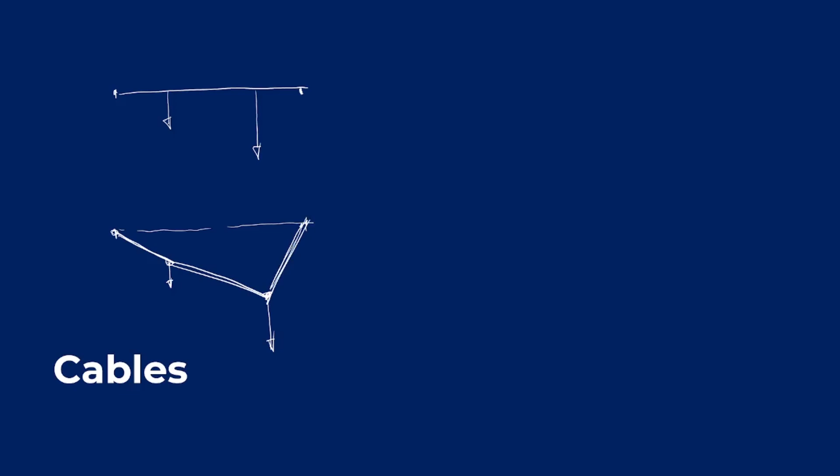So from this point going to here, we have a straight line. From here, going to here, we also have a straight line. And from here, going to here, we also have a straight line. Now, that is one of the cases.

The other case is when we have a cable subjected or loaded by its own weight. What happens, for example, is we have a cable initially like this one. And then, since the cable has its own weight, what will happen is that the cable will sag because of its weight.

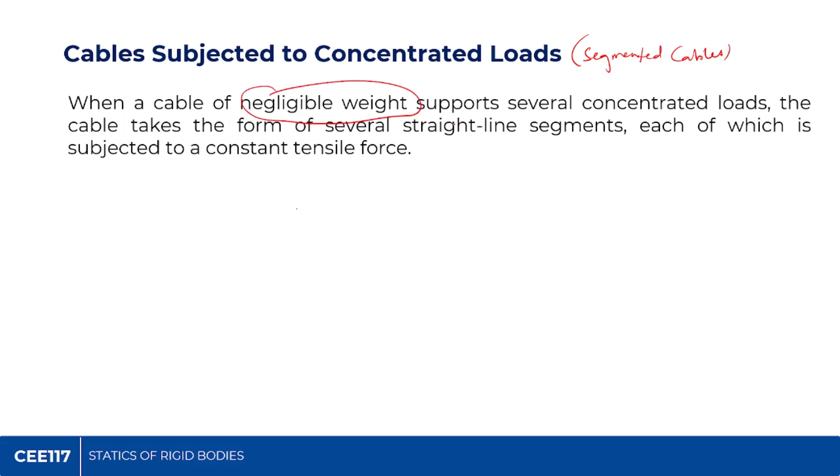When a cable of negligible weight, okay, we assume that the cable's weight is negligible, when that cable supports several concentrated loads, okay, the cable takes the form of several straight line segments. That's why it's called segmented cables.

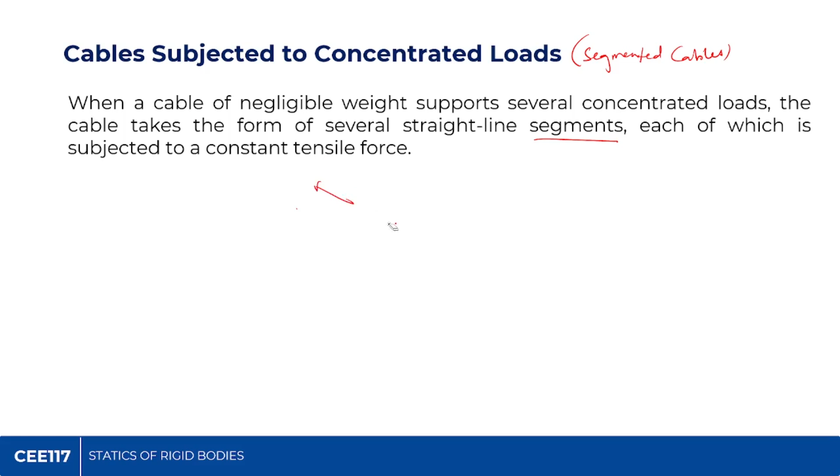Each segment is subjected to a constant tensile force. So unlike with plane trusses, where we assume that all members are in tension, and upon calculating, if negative, then our assumption was wrong for that member, so we can conclude that specific member is in compression. But for concentrated loads on cables, or segmented cables, our assumption is always tension, and the cable always experiences tension, not compression. There's no rope that can be compressed. So the rope or cable always experiences tension.

Okay, example, like this one. We have a cable or rope like this, and you'll notice it being subjected to a concentrated load P1 and another concentrated load P sub 2. So when we apply P1 and P2, what will happen?

Mag-sag yung cable natin. Nag-apply tayo ng P1 o load dito, concentrated load sa point C. Ito yung reference point natin. So galing sa reference line, papunta dito sa actual na nangyari, nagkaroon tayo ng sag at point C. Sa Bisaya, nilaylay ang atong cable, at that amount. If we also apply concentrated load at point D, it will also have a sag denoted by Y sub D.

So kung i-add natin lahat, yan yung tinatawag nating span. Sinasabi nating span, that is the distance from each supports, kung saan naka-tie up yung cable natin.

Basically, magkakaroon tayo dito ng parang joint method, o method of joint sa cable. We'll evaluate at joint C. Ano ba yung mga forces involved dyan? We have P1, meron tayong force dito, lahat yan naka-tension. Tension at CD, tension at CA. Yan yung gagamitin natin.

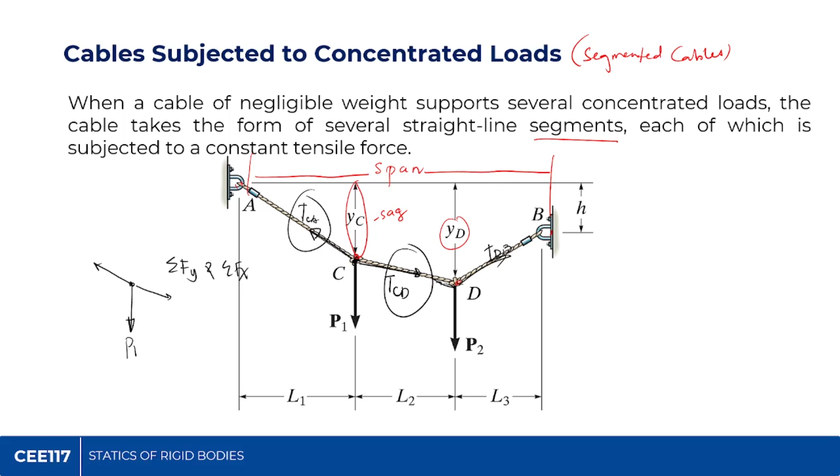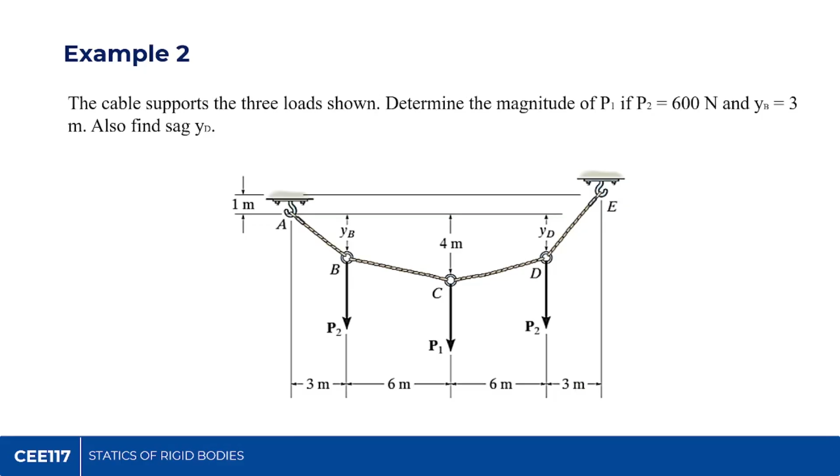We'll start answering two problems today, and I think that's enough na for the discussion on cable. By next week, I'm planning to start the discussion on dry friction, kasi mga 5 sessions na lang siguro ng discussion. At most, yan na lang yung magiging 5 sessions at most. I-congest natin yung discussion natin para makover natin yung dry friction, moment of inertia, centroid. So let's try answering two problems today.

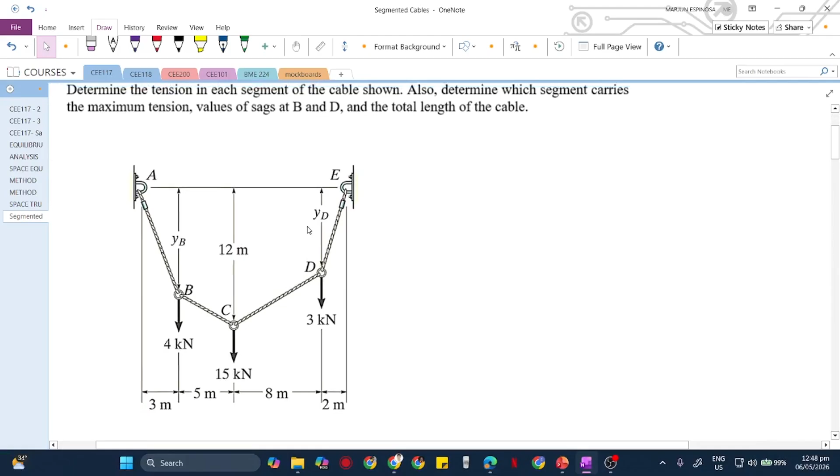Segmented cables tayo class. Problem number 1: Determine the tension in each segment of the cable shown. Ito yung cable natin. Also determine which segment carries the maximum tension, and also the values of sags YB at B and at D. Ano yung mga value ng YB at saka YD dito? Tinatawag natin yan as the sags. And the total length ng cable - ang total length ng cable is not the span.

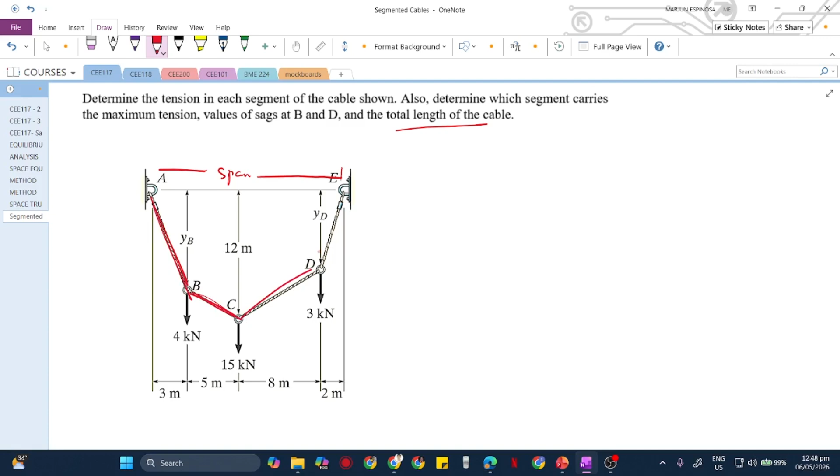Hindi yung span. Ang span, yan yung distance from each support. Pag sinasabi nating total length of the cable, itong length na to, i-add natin sa length na to, tapos i-add natin sa length na to, at i-add natin sa length na yan. Yan na yung total length ng cable natin. Sige, let's start. Una, we can create a free body diagram.

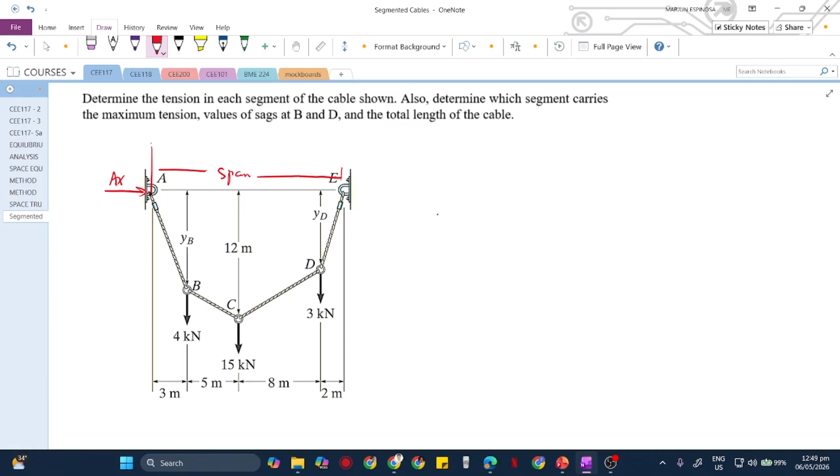Yung cable natin naka-attach dito. Kapag ganyan, we can assume dalawang reaction. Meron tayong reaction along X - pagpalagay natin, ito, reaction along X. Since pababa lahat to class, we can assume na yung reaction dito o support dito will be opposite in the direction ng mga concentrated loads dito. So we can say that is A sub Y. Dito din, since AX lang yung counterpart nito, we can also assume yung EX papunta dito, and then we have here E sub Y.

Such that if we sum up the forces along X, equate that to 0, positive yung magiging direction nito, yung AX natin na value minus EX equivalent sa 0. Wala nang other forces along X, therefore yung AX natin is equivalent sa EX. So one of the conditions - although hindi pa natin masolve yung AX at saka EX, pero we know that they have the same value, or they are supporting the same lang.

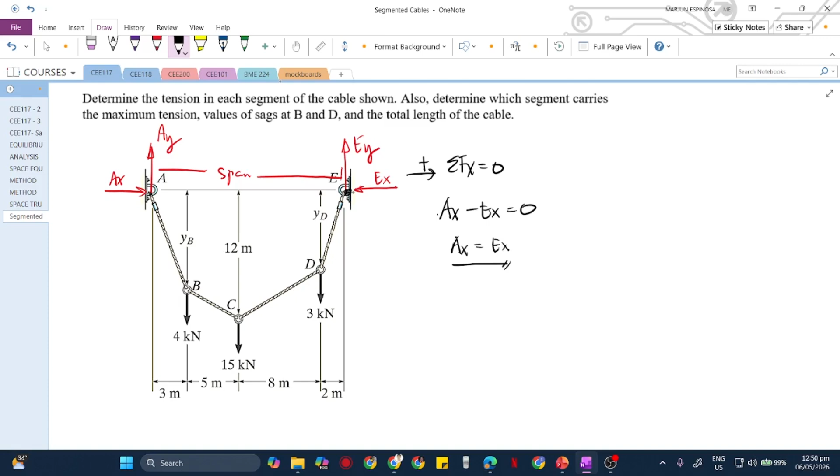Kasi, ganito yan. If we take the moment at point E, yung value lang is may AY lang. Yung AX magiging 0 yan. Therefore, we can also say that kung wala tong EX, wala din itong AX. So 0 yung dalawa - AX is equivalent sa EX and that is equal to 0. So doon tayo sa taking the moment at point E.

If we sum up the moment at point E, sino makukuha natin dito, class? Si AY. Kukunin natin yung sum up natin yung moments at E, then that would mean we'll cancel this E sub Y - wala yung moment. Ano lang may moment dito? Itong 3 kilonewtons, 15 kilonewtons, 4 kilonewtons, at saka AY. Yung AY, clockwise yung direction niya. So therefore, we have here AY, at ano yung distance niya? Galing dito sa point E, that is 3 - ito, 3 plus 5 plus 8 plus 2. So ilan lahat din, class? We have here 8, then 10, so that means we have 18. Okay, correct.

Minus, lahat to, 'di ba? Counterclockwise. Kasi pababa. So we have here 4 kilonewtons, tapos yung distance niya galing sa point E, ilan yan? 15, tama ba? Okay, minus, ito din 15. Then ilan lahat to? 10. Then lastly, itong 3, 3 kilonewtons. That is 2 meters from point E.

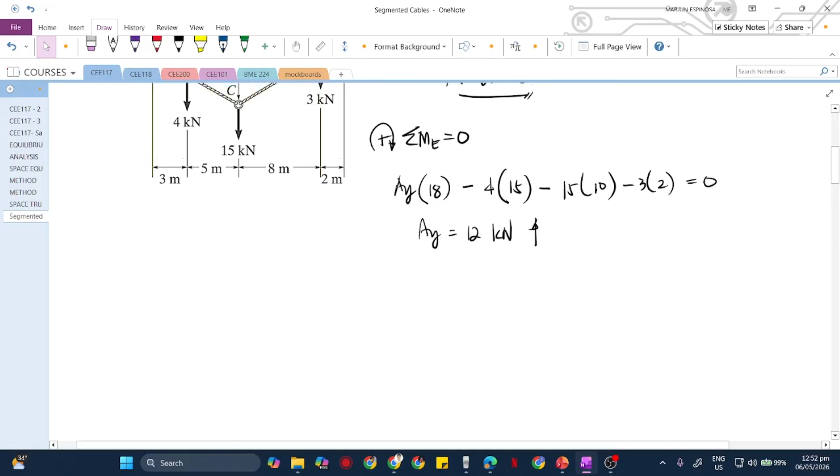Determine the tension in each segment. Okay, hindi ito segment, ha, this is just the support. Now we can solve for the value of EY directly, tama ba? We can just sum of the forces along the vertical, equate that to 0, along Y. Equate that to 0. So we have now for AY, nakuha na natin yan, that is 12 kilonewton, okay.

So, therefore, we can just use that one, AY, which is 12 minus 4 -- sorry, 4 pala -- minus 4, minus 15, minus 3, plus yung EY natin, equate that to 0. Okay, anong value makukuha natin sa E sub Y? 10, sir, 10, okay, 10 kilonewtons. Positive din yan, tama yung naging assumption natin na paitaas din. So, lagay lang natin tong value ng E sub Y, that is 10 kilonewtons.

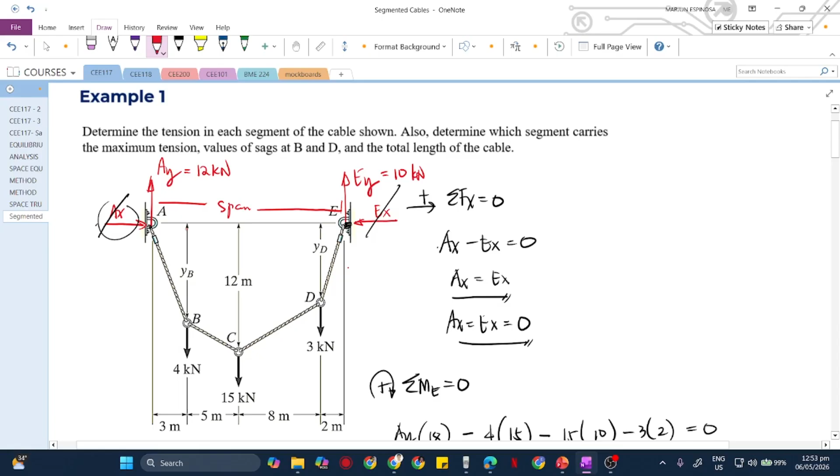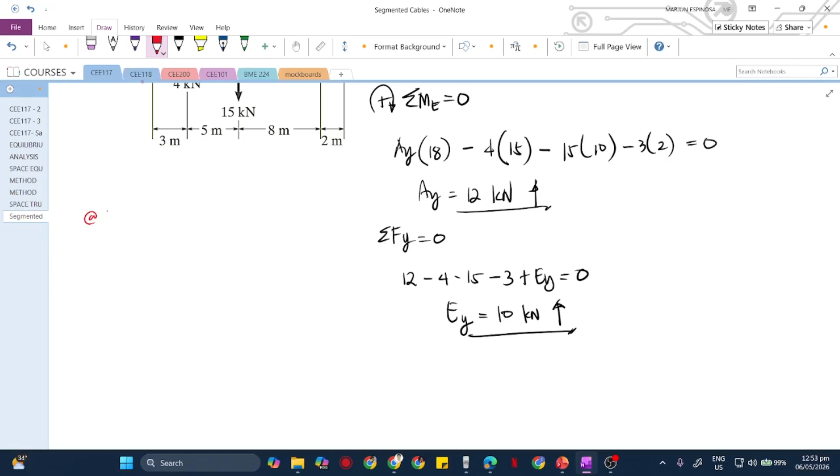Now, we can start by what? Pwede tayo mag-start galing dito sa left, then papunta tayo dun sa right, no? Galing sa left, papunta dito sa right. Or pwede din kayo mag-start dito sa right, papunta sa left. Kahit saan lang diyan, similar pa rin yung makukuha natin. Okay, so start tayo sa segment -- segment yung sabihin natin dito class ha, hindi na siya joint kumbaga kasi we're dealing with segmented cable. Segment C tayo, okay?

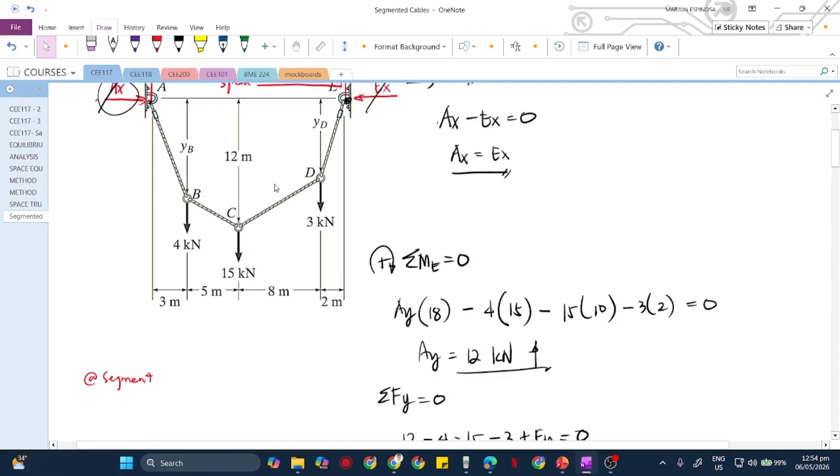Ay, hold on, pwede pala natin makuha yung value ng AX at saka EX. Sorry, hindi pala yun ina-assume natin na 0, pero they are just the same, equal lang yung magiging ano niyan, no? What we can do is that para makuha natin yung value ng AX at saka EX, no? We can choose among these three. Saan tayo magmo-moment diyan? Kayo na bahala.

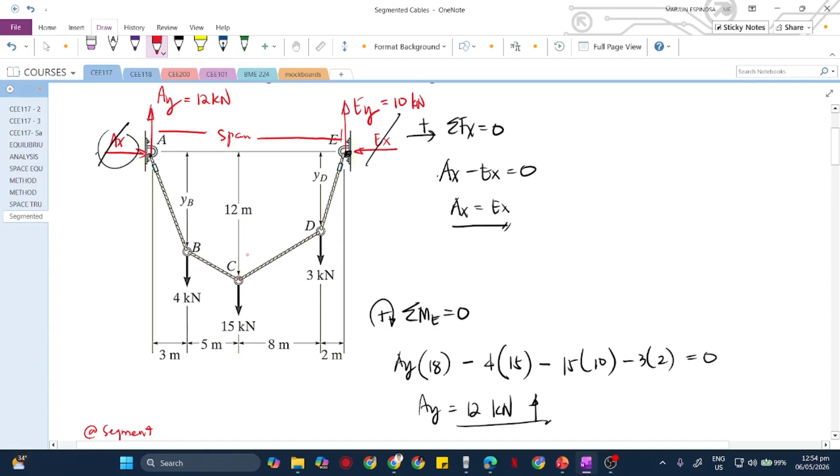Pwede tayo mag-moment sa point C, dito lang tayo mag-moment sa center, no? Okay, if we'll take the moment at point C for AX, para makuha natin yung value ng AX at saka EX, sir, EX, tama. So, but we know they are just equal, for AX saka EX, they are just equal. So, gamitin natin yung moment at point C, equate that to 0. Okay, ano yung may moment dyan? So ito, clockwise, counterclockwise, so negative. Ito, clockwise, so kaya positive. So meron din tayong EY, nakuha na natin AY, then makukuha natin value ng EX at saka AX. Okay, so mag-take tayo ng moment at point C.

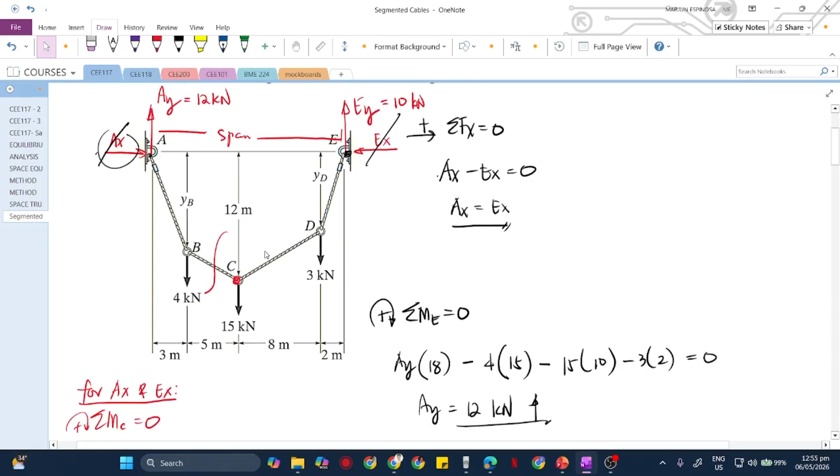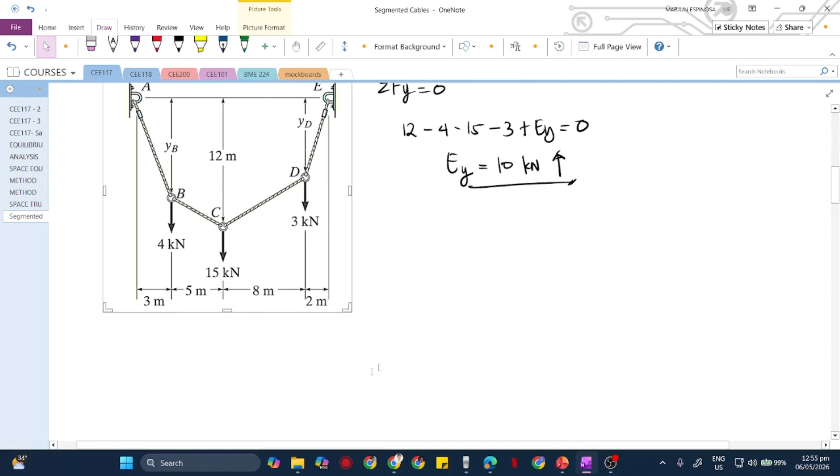Pwede natin gawin, okay, since dalawang equation to, mangyari niyan, pwede natin gawin is that we can parang divide, no? We can cut through this one, no? I-cut natin yung rope natin dito. Still, will moment at point C para makuha natin si AX. Okay, so ang mangyari niyan, no? Gawin ko lang yung ano ha, gawin ko lang yung tawag nito. Etong, okay, try natin i-crop para mas maganda, no? Crop natin, so crop natin yan galing dito. Ayan lang siguro, okay, or can also include this one.

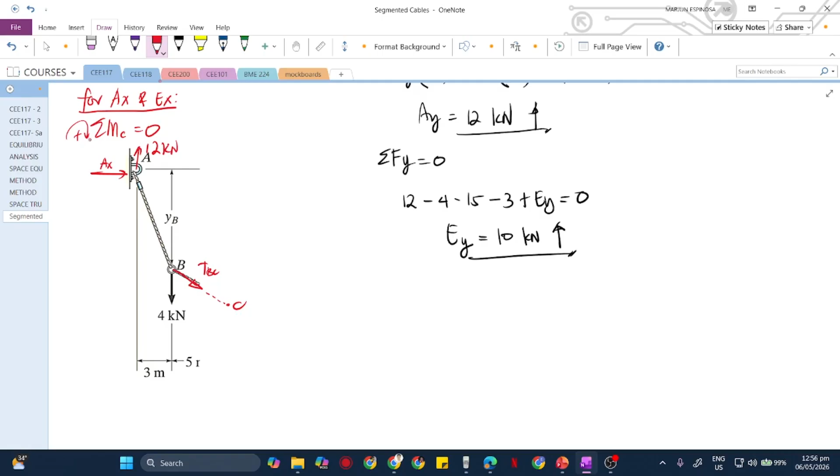Okay, ganyan ba? So we have here yung AX, no? AX, then we have here the 12 kilonewton, and then we have here our galing dito, meron tayong tension, no? Tension BC yan, no? Tension BC, yan. And then may point C dito, di ba? Okay, gawin natin, if we take the moment at point C, ito yon, no? Okay, if we take the moment at point C, yan yun.

Okay, so mangyari niyan, dito tayo magmo-moment. Itong 4 kilonewtons, that will have a counterclockwise. Itong AX, that will have a clockwise. Similar with 12, clockwise din yan. So, therefore, ang mangyari dito, masasolve na natin yung AX. So basically, we have here AX, positive yan. And that is, galing sa point C, ito, ano yung value nito, class? Galing sa point C, anong value nito? Ito lang yun, 12, di ba?

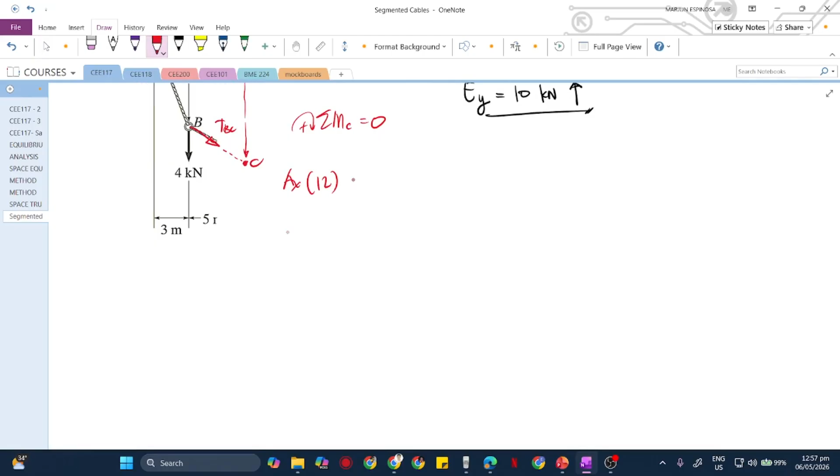Sir, 12. Ito yun, 12. Okay? So that is 12 dito, plus 12 kilonewtons, itong sa taas, and that is 3 plus 5 with respect to C. That is 8, with respect to C. And then, lastly, itong negative 4, and that is 5 meters away from C.

Equate din natin sa 0, makukuha natin yung value ng AX. Pakikuha ng value ng AX, class? Negative 6.33, sir. Negative, sir. Okay, negative 6.333. Okay, so negative yan. So mali pala yung ating direction. Therefore, yung AX pala is 6.33 kilonewton and that should be in this direction.

Tama? Okay. Since yan yung AX, therefore yung EX natin, similar lang siya sa AX, equivalent sa 6.33, pero yung direction niya is kabilaan din sila, di ba? Opposite lang yung direction nila. So yung AX natin dito, pag ganito, yon. And yung EX natin, pag ganito din. Although they have the same magnitude, 6.33, dito 6.33 din.

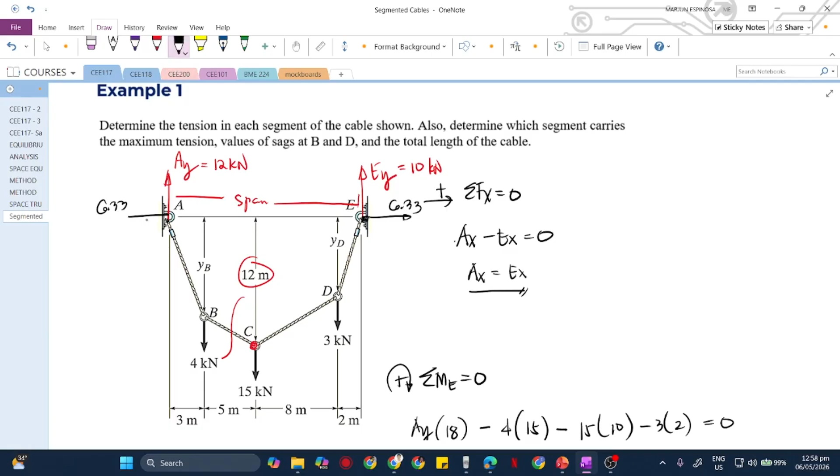So nakikita nyo naman, tension lahat yan. Tension, no? Tension halos lahat. Tension talaga dapat yan. Okay, so that is 6.33 kilonewton papunta doon, and then EX natin 6.33 kilonewton, papunta naman sa opposite direction.

Okay, then we can still use the same, ito. Since nakuha na natin yung AX, so yung AX pala natin is papunta dito, 6.33 yan. So makukuha na natin yung value ng ito. Makuha natin to first. Gawin natin dyan is that, or pwede natin to tawagin nito. Ito na lang siguro yung gagamitin natin, segment na to para makuha natin yung value ng TBC.

Okay, for TBC, pwede natin gawin is that since along X, dalawa lang yan, 6.33 at saka yung along X component itong TBC, ito yon, di ba? Kuha tayo ng component niya. May dalawang component yan, papunta dito, that is TBC along X, and meron din tayong papunta dito, which is TBC along Y.

Okay, so since TBC at saka itong 6.33, yan lang yung along X. So we can use that one. We can sum up the forces along X, equate that to 0. Pero kunin muna natin yung angle nito. Ano bang angle nito, class? Angle BC, dito na part. This is angle BC. Ano ba yan? Paano natin yan kukunin?

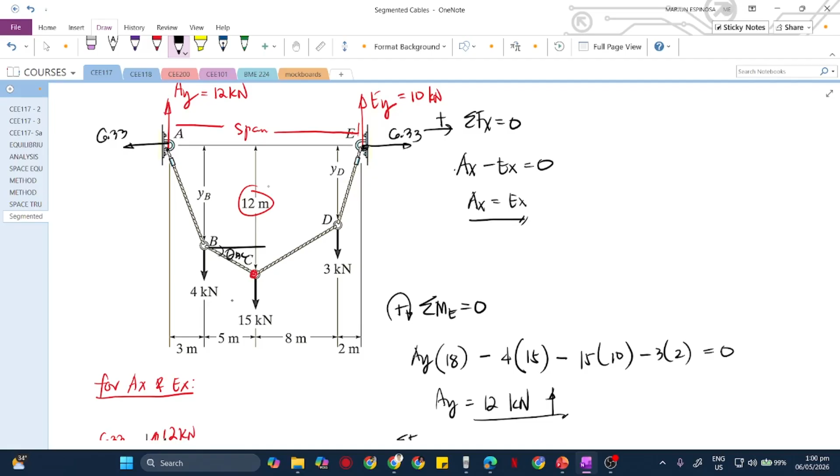Any ideas? Paano natin kukunin tong angle BC? Okay, kung hindi yan makuha, din natin i-push. Pwede naman with tawag nito, express natin yan by angle theta. Then we'll try to make a way later na ma-evaluate yung angle theta nito, theta BC.

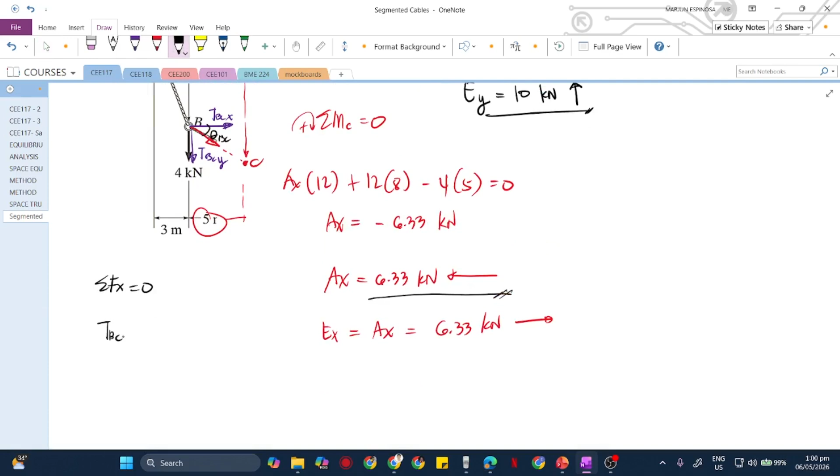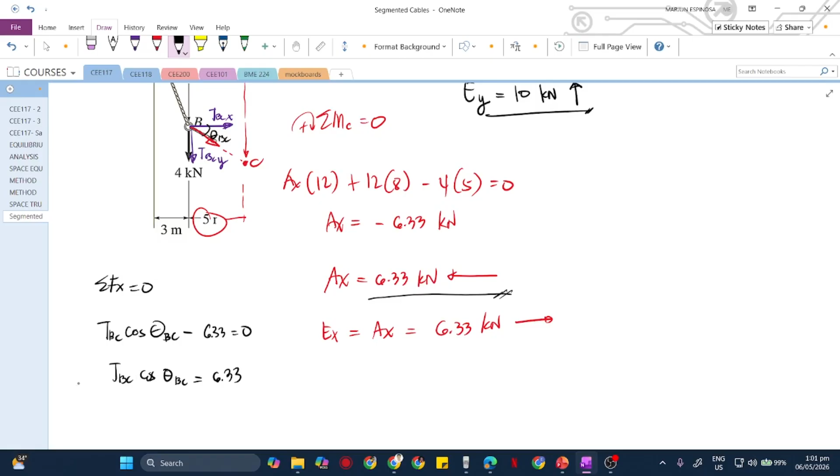Okay, so patuloy natin. We have here TBC, and that is cosine of angle BC, ganyan. Then minus yung 6.33. Ito yun, 6.33. Equate that to 0. So therefore yung TBC natin, cosine of angle BC, is equivalent sa 6.33. Ito yung magiging first equation natin.

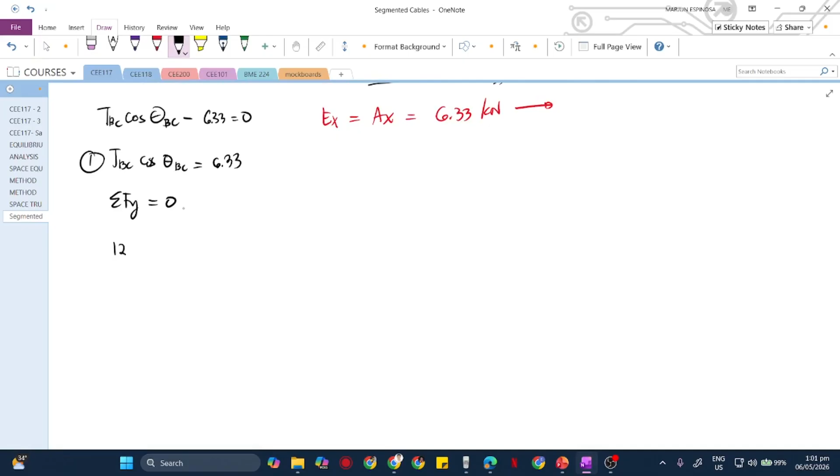Okay, we can also sum up the forces along Y, equate that to 0. So ano yung makukuha natin dito? Ano yung mga along Y? Itong 4 kN at saka TBC Y, paano yan? Sa paibaba, so that is negative. Yung positive lang dito is yung 12 kN. So 12 kN minus negative 4 minus TBC sine of angle theta BC, equate that to 0.

Okay, gawin natin, transpose natin sa kabila, yung TBC negative. Unahin lang natin yan dito pagsulat. TBC sine angle theta BC. Ito, 12 minus 4, that is 8. So ito na yung magiging second equation natin.

Now kung i-divide natin tong first equation, divide by second equation, okay, ano mangyari niyan? Or say for example, second equation over first equation. So yung second equation, TBC sine angle BC, equivalent sa 8. Divide natin yan by TBC cosine of angle BC, equal yan sa 6.33. Ang mangyari nito, makancel yan, so sine over cosine, tangent yan. Tangent BC equivalent yan sa 8 over 6.33. From here, makukuha natin yung value ng angle BC, which is just basically arctan of 8 over 6.33.

Tama ba, class? Tama ba itong ginawa ko? Yes, sir. Okay, tama po. Kindly give me the value, 51.65, sir. 51.647, sir, ang value nito? 51.65. Okay, so sabihin natin 65 na lang. 51.65, tama ba? So yan yung magiging angle natin.

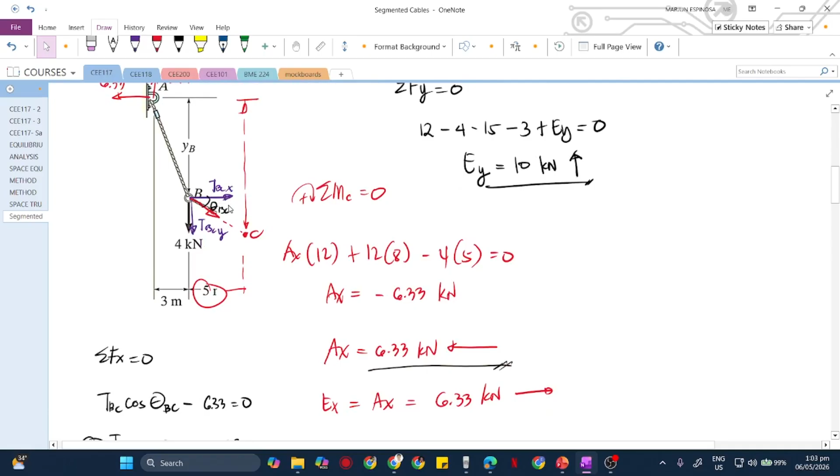Gagamitin natin tong angle na to later. Okay, leave muna natin dyan. Therefore, kung nakuha na natin yung angle na to, makukuha na natin yung value ng TBC. Tama ba? So pwede nyo gamitin either equation 1 or equation 2. Pero sa akin, equation 1 na lang guys, kasi mas madali, no? From equation 1, dito na lang siguro.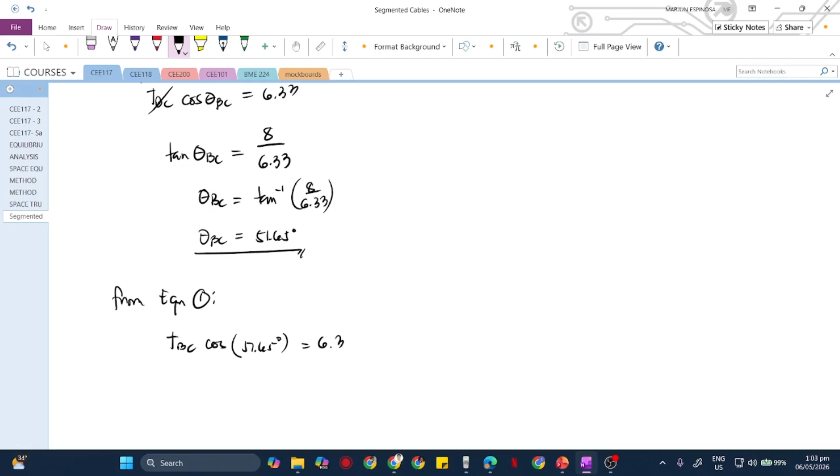Gawin natin, para dire-diretso tayo, eto, lagay natin dito, yan. And then, from equation 1, TBC cosine of 51.65 degree equivalent sa 6.33. Okay, kindly give me the value of our TBC, tension at segment BC. That is equivalent sa

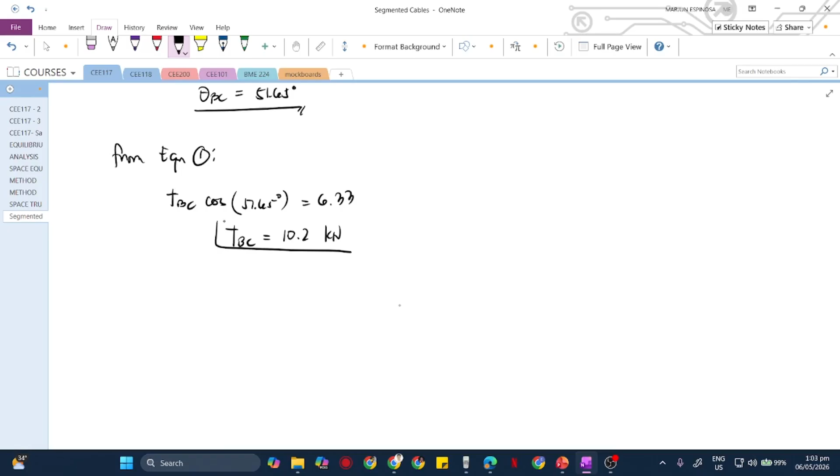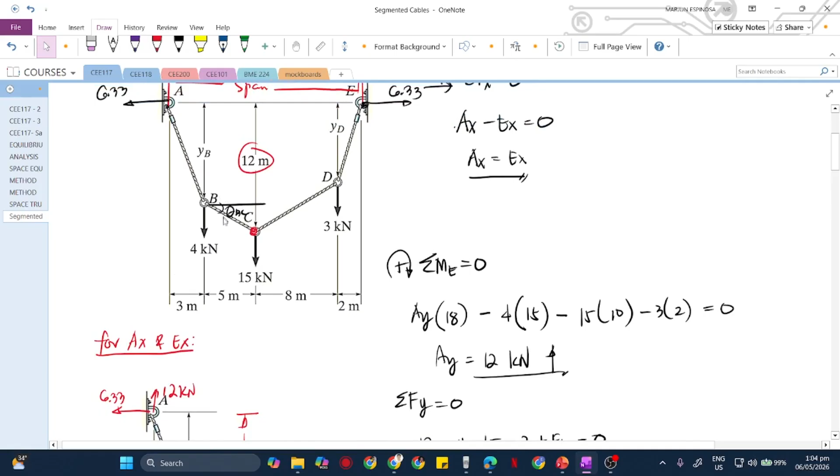10.2. Okay, kindly confirm if correct to class. Yes, sir. Okay, yan yung tension natin sa BC. So nakuha na natin yung isang sagot natin. Determine the tension in each segment. So itong part na to is basically equivalent pala sa 10.2. So gawa tayo ng magiging natin diagram, para doon natin ilagay lahat ng magiging natin, yung tawag nito.

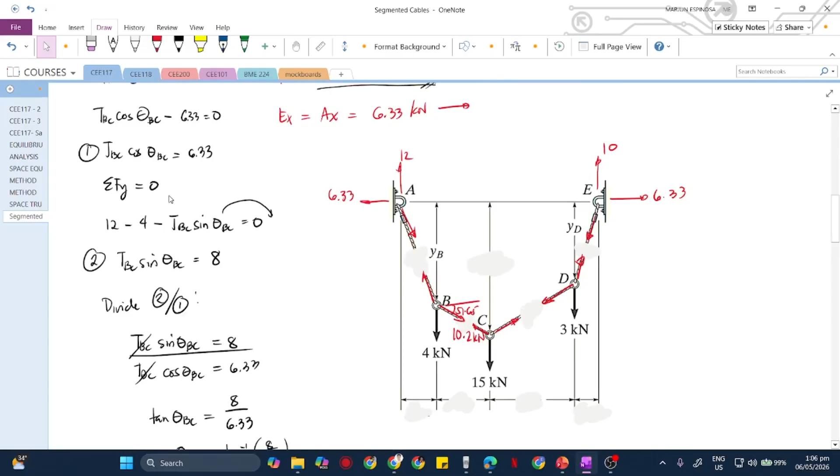So let's use the tension at point B, or the segment at point B. This is the diagram, okay? Let's work on segment AB. Using the diagram we have here, we have the tension going toward...

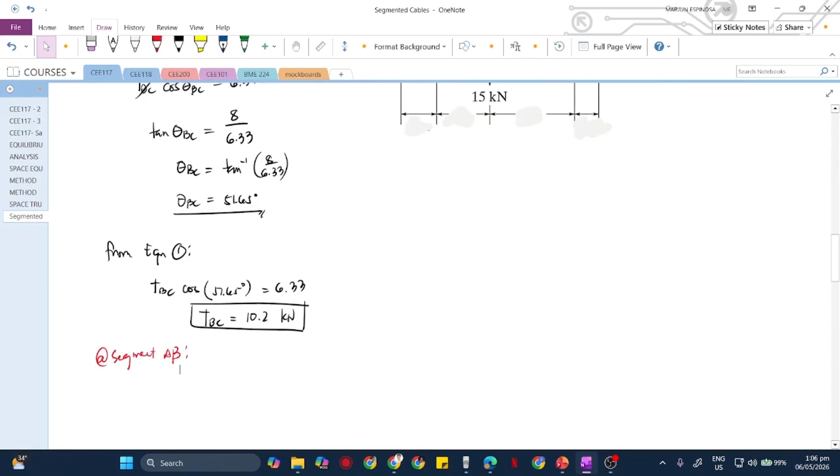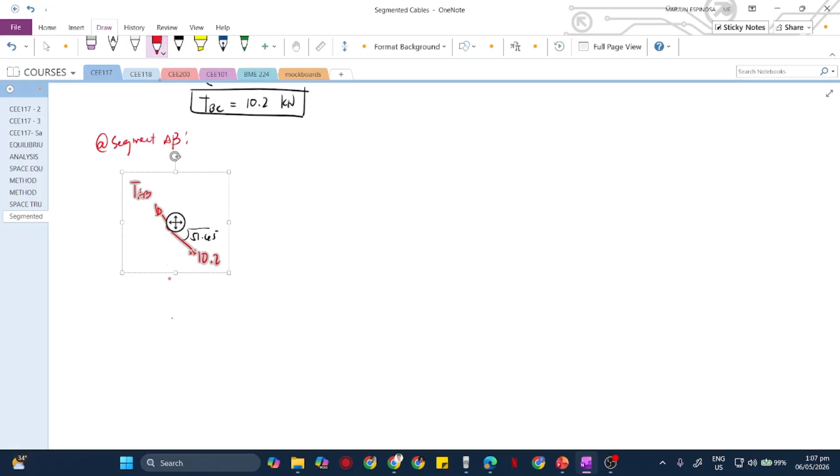TAB. And then we now have our value for tension BC, 10.2. Correct, this is 10.2. Okay? And that is 51.65 degrees away from this x-axis. Then we also have 4 kilonewtons here, correct? We have also 4 kilonewtons here.

Let's enlarge that. So that is 10.2, okay? So we can now get the value of our TAB. But we also need to evaluate the angle here. So what angle is this, class?

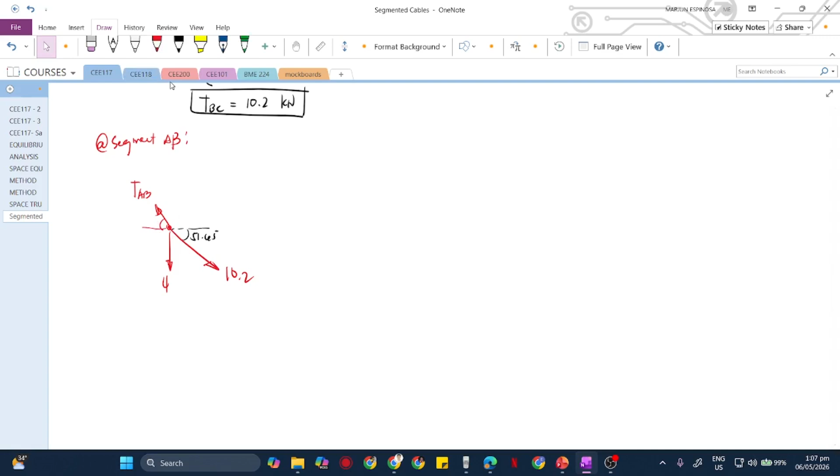What do you think this angle is? Let's call it angle AB. Okay, the process is still similar. It will take the summation of forces along X and along Y, and then we'll have two equations, then we get the angle. From there we get the tension AB. That's going to be our process here.

Okay, we can sum up the forces along X, equate that to 0. So we have negative TAB times cosine of angle AB. Then, positive 10.2 cosine of 51.65. So there are no other forces along X. Equate that to 0. So let's transpose our TAB.

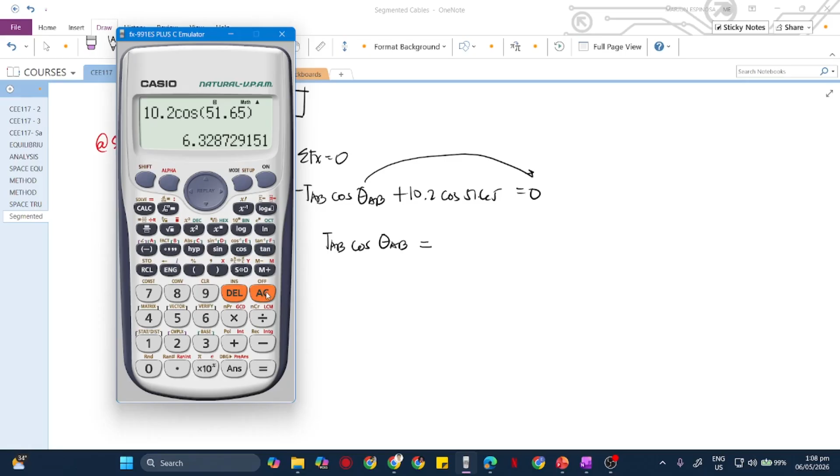Let me write this first. TAB cosine of angle AB, that's equivalent to the positive value of, what's the positive value here? 10.2 cosine of, make sure you're in degree mode, 51.65. What value is this, class? Is this correct? 6.33. Okay, 6.33, similar to earlier. So that's going to be our first equation.

Now, summation of forces along Y equated to 0. So along Y, we have positive TAB sine of angle AB, then minus 4, and minus 10.2 sine of 51.65. Okay, equate that to 0.

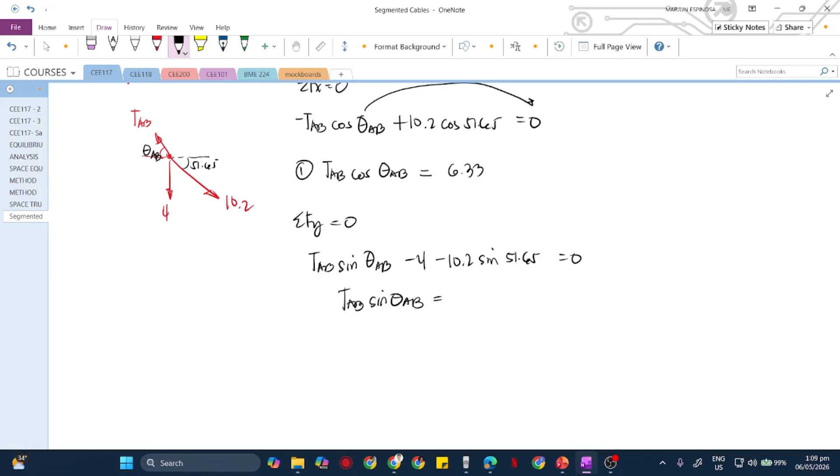So our TAB sine of angle AB is equivalent to, how much is this, class? 12, sir. 12, right? Okay, yes. So this is our second equation, approximately.

So therefore, dividing equation 2 with equation 1. We have TAB sine, let's put sine first so we get cosine, because if we put cosine first we'll get cotangent. This one is 12 over 6.33. So TAB cancels out. Therefore what we get is the tangent of angle AB, equivalent to 12 over 6.33.

Okay, let's get our angle AB. 62.19, sir. 62.19, or that's just 62.2. So that's our angle for angle AB, right?

So you can choose either of the two equations. Let's use equation 2. From equation 2, TAB sine of 62.2 equals 12. Therefore, our TAB is equivalent to, what is this, class?

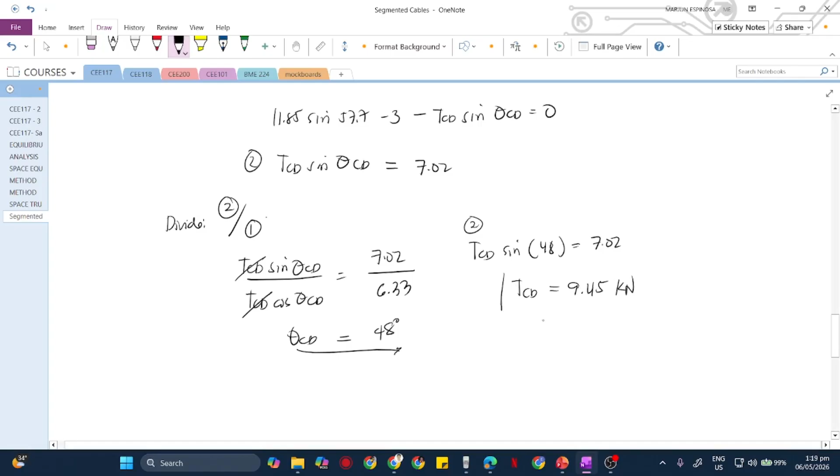Anong value makukuha natin dito? 9.45 kilonewton. Okay, so nakuha na natin yung mga tensions dyan. Yan na yung magiging sagot natin.

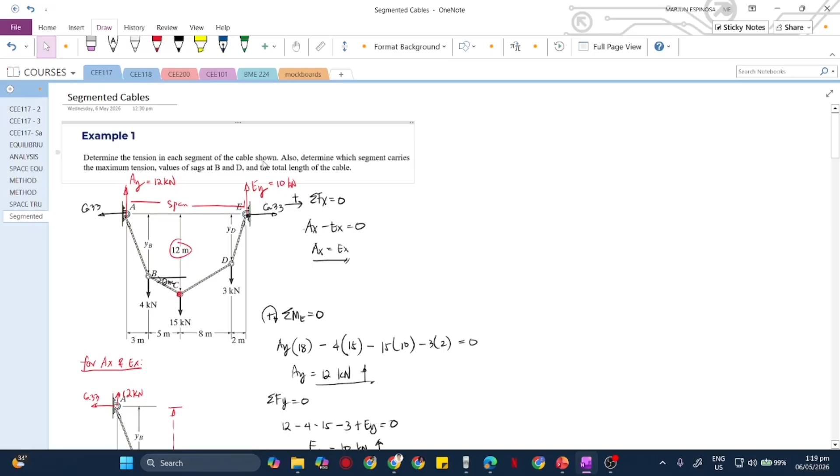Determine the tension in each segment of the cable shown. Yan na yung nakuha natin. Also, determine which segment carries the maximum tension. Anong value dito mas malaki, class?

Etong 13.6, no? Therefore, for question number 2, this is basically question letter A. This is next, letter B, the maximum tension. Okay, the maximum tension is at segment AB, which has a value of 13.6 kilonewton. Yan yung maximum tension natin.

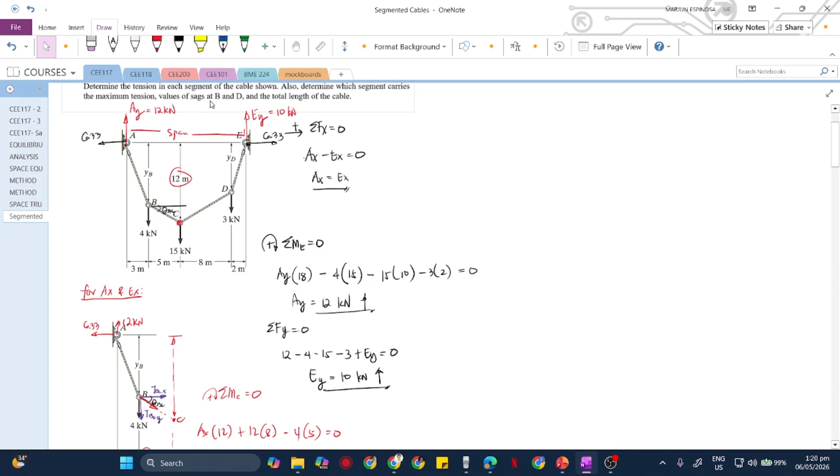Kuha ba, class? Then lastly, meron pa tayong dalawang tanong dito, values of sag at B at saka D. So, gamitin na natin yung nakuha natin ng mga values dito. Since kukunin natin yung value ng YB, ito yon YB, no? So, i-draw tayo ng triangle dito, class.

Dito ko na lang ilagay. Draw tayo ng triangle dyan, parang ganito. Dahil lang to, class, ito yung triangle natin. So, this is 62.2, tama ba? Ito yung sag na kukunin natin.

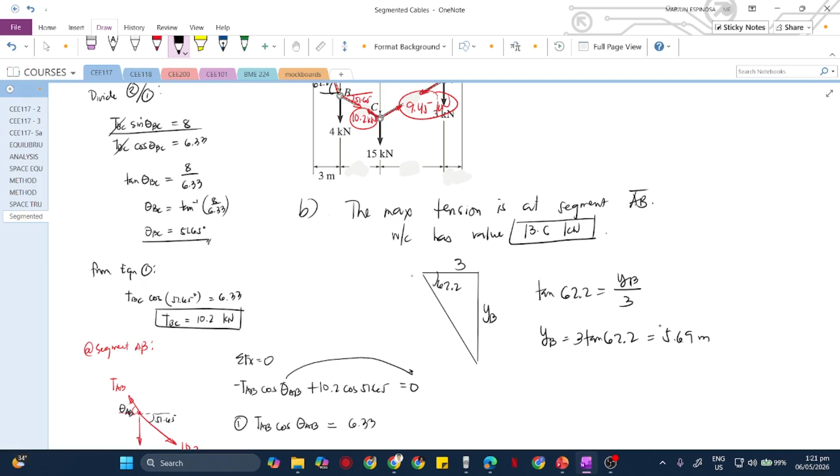At saka, we know this one, itong length na to. Ilan to, class? This is 3, tama ba? So, gamitin natin yung tangent of 62.2 equivalent sa YB opposite over 3. So, yung YB pala natin is 3 tangent of 62.2. Ano kano to? How much is this one? 5.69 meters.

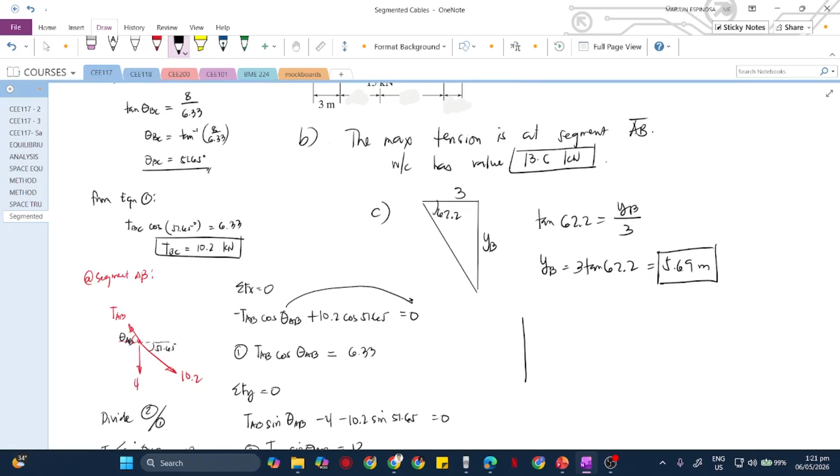Tama ba, class? Yan yung sag natin sa point B. For YD, gamitin natin tong triangle na to. Draw ko lang ulit ng triangle. Okay, this one is 57.7. Ito yung pinapahanap dito, YD. Okay, and this one is equivalent sa ano to, class?

2, okay, 2 yan. So, ito 8, ito 5, okay, 2 to dito. So, therefore, similar pa rin. Tangent of 57.7 opposite YD over 2. YD, therefore, is equivalent sa 2 tangent 57.7. Anong value to, class? 3.16 meters. So, yan yung sa YD.

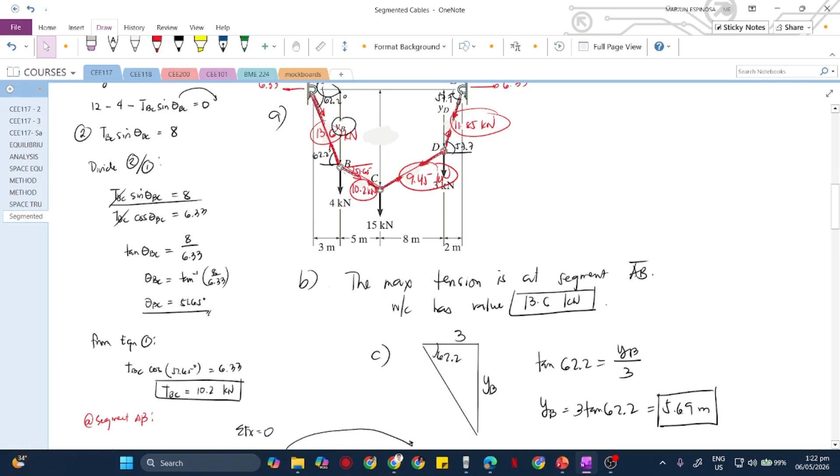Okay, lastly, yung tanong pa. Ano pang tanong? Total length. So, yung total length, summation lang yan ng lahat na to. Ito na part, ito na part, ito na part, tsaka ito na part. Okay, so dito pa lang, kukunin natin tong length na to, class, itong length na to, at tsaka itong length na to.

So, using this triangle, that is basically, pwede natin gawin, itong 3 yung gamitin natin. So, that is cosine of 62.2. Ilagay na natin dito, no? For letter D, total length. Okay, 9 natin to dito na part. So, that is cosine 62.2, adjacent side is 3. Ito yung gagamitin natin. Distance 1, so basically that is 3 over cosine 62.2.

Ito na part. Kasi yung D1 dyan is hypotenuse yan, no? So, di ko na yan anoin ha, kasi ano lang yan, trigonometry. So, dito, okay, sabihin natin dito to. Ito, so that is basically equal din sa 2 over cosine ng 57.7. Plus, meron pa tayong dalawang nakaligtaan.

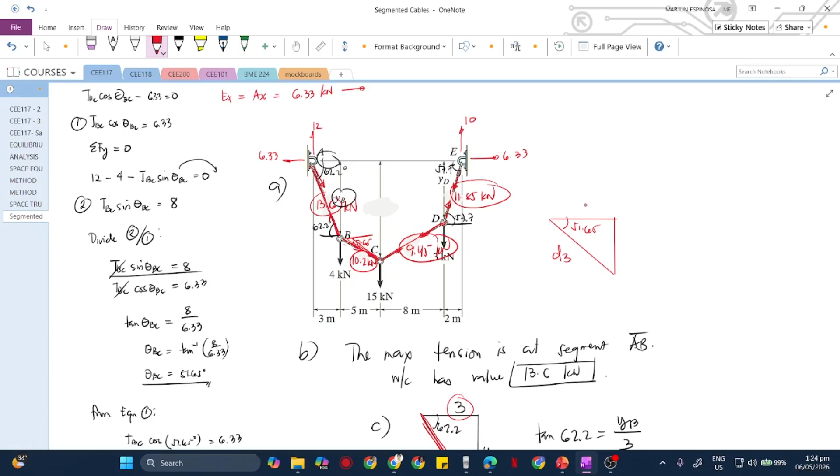Itong part na to, okay, itong part na to. Draw natin yung triangle na yan. Sabihin natin to D3. So, this one is 51.65. Ito, meron tayong 5 dito, tama ba? 5 yan, no? So, that is cosine pa rin, no? 5 cosine of 51.65.

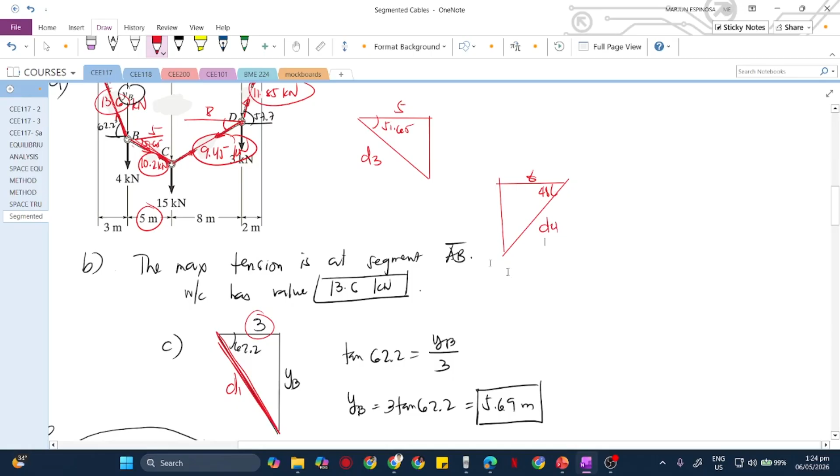And lastly, okay hold on. Konti na lang class. Okay, and lastly, itong part na to, triangle na to, tama ba? Ano angle nito, class? 48, sir, diba? 48 yan. So, nakuha natin 48 to. And then dito, this is 8. So, makuha natin tong D4 dito. Ito yung D4 natin, hypotenuse din yan, adjacent pa rin yan, no? Yung 8, tapos cosine of 48.

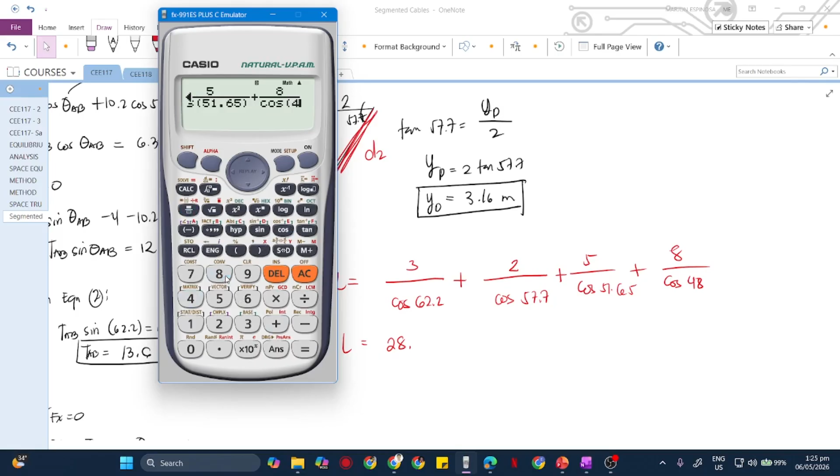Then, what is the total length? 30.19. Ano to, class? Similar ba kayo nakuha? Bakit magkaiba kayo, class? 3 cosine 62.2, plus 2 cosine 57.7, and lastly we have here 5 over cosine 51.65, plus 8 over cosine 48. Ang sagot dito is 30.19 or 30.2 meters. Yung total length pala ng cable is 30.2.

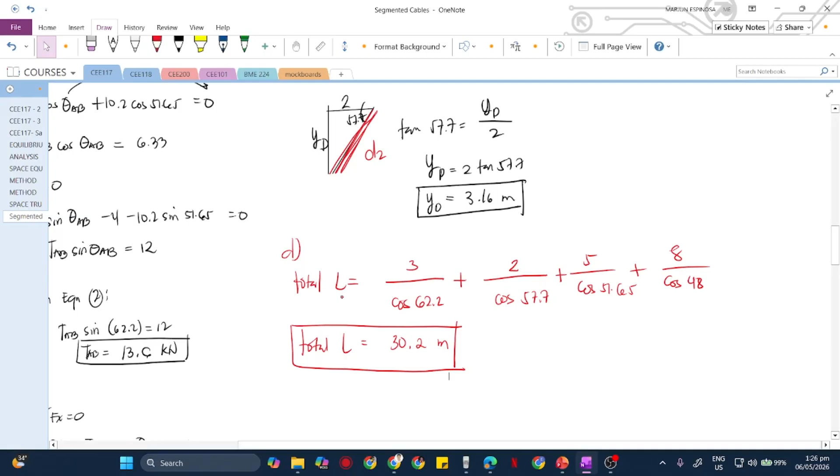Okay? Yan ay yung magiging sagot natin. So, isang tanong lang, no? Pero isang oras din, no? Paano na lang sa exam nito, class?